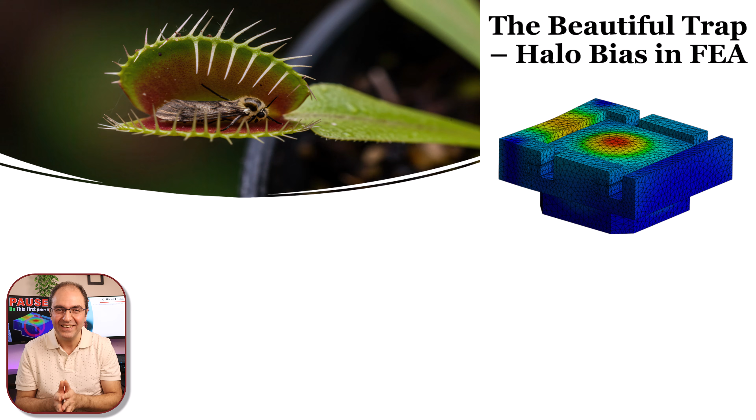Look at this contour plot of total deformation on this device that is called hydroformer. Is this colorful? Is it beautiful? Yes, it is. But is it correct? I can tell you, it's not. Now, let me show you the correct one. See the difference? So remember, just because your model looks good doesn't mean it is right. Beauty in FEA should never ever replace scrutiny. This is a very important message I have for you.

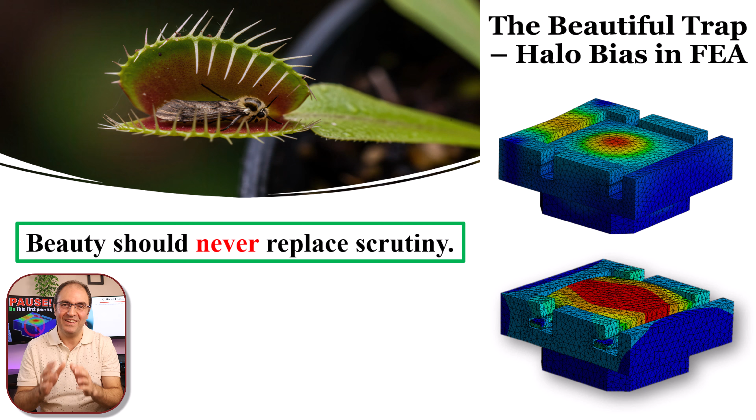Now, let's switch the gear. Let's talk about theory. Learning the theory behind FEA isn't optional, it's essential. It gives you confidence, helps you troubleshoot, and makes your model more than just guesswork with nice colors. But don't try to learn everything at once. You don't need to dive straight into nonlinear thermomechanical coupling or plasticity models on day one.

Start simple. Walk before run. Let your knowledge of theory grow with your experience. That way, you won't drown in it. You'll actually use it. Oh, one thing I need to mention. We will also cover some theory in this video series. I'm sure you will learn a lot and enjoy.

Now, theory has another form as well. Let's cover that too. I am talking about the theory behind the physics of the finite element model. You need a solid grasp of the fundamentals. Start with statics. Make sure you can draw and interpret free body diagrams. Can you isolate a part of your assembly and show all the boundary conditions on it correctly?

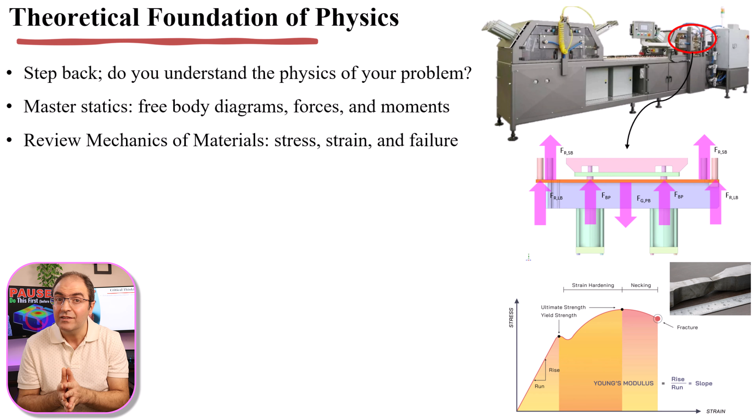Next, review mechanics of materials. Know how materials deform, how stress develops inside components, and when yielding or failure occurs. Without this understanding, you won't be able to judge whether your results make sense or not. But remember, skill in one area doesn't automatically translate to another. Being confident in structural mechanics doesn't mean you're ready to tackle heat transfer or fluid flow problems. Each domain has its own governing equations and unique behaviors.

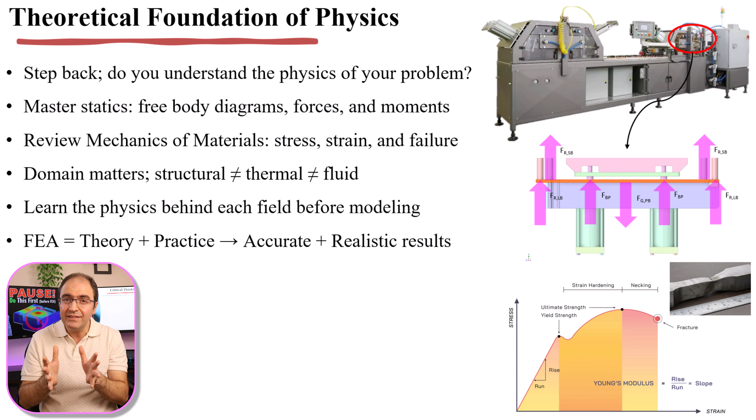If you're analyzing thermal gradients or fluid dynamics, take the time to learn the underlying physics before setting up your model. Ultimately, effective FEA requires balancing theory and practice. Theory guides you in building the right model and interpreting results critically, and practice tells you what makes sense in the real world and what doesn't. Okay, enough about theory for now.

Let's talk about an important resource that can help you in your FEA journey. I want to talk about FEA Mentor. Yes, if possible, find one. Someone you can bounce ideas off of, ask questions, and learn from their experience. A good mentor doesn't just give you the answers, they help you ask better questions. They have likely seen the pitfalls, the common mistakes, and the clever tricks that don't show up in textbooks. And having someone in your corner can accelerate your learning more than any manual or tutorial.

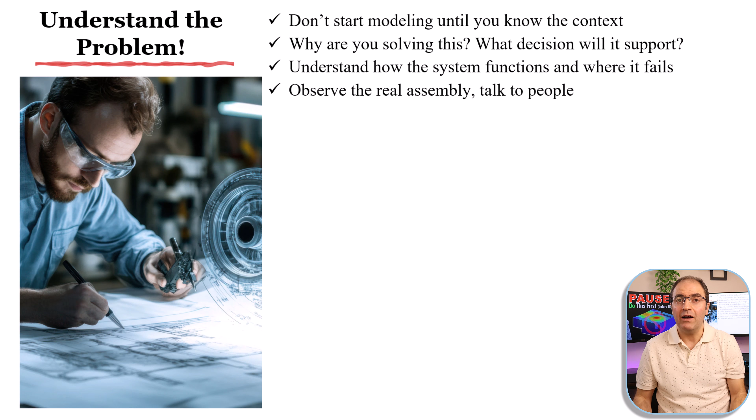Now check the CAD model with a critical eye. What's simplified? What is missing? Where are the joints? Where are the contacts? What is bonded, bolted, or free to move? Then identify material behavior. Are you dealing with ductile failure, brittle one, fatigue, temperature sensitive behavior?

Then loads and constraints. What's applied? What is prevented? Is it thermal, dynamic? How about transportation? How about multiple load cases? Then define the overall physics of the problem. Is it structural, thermal, coupled, modal, transient? Now decide what outputs matter. Stress, deformation, temperature, pressure. Remember, not everything you can plot is something you should use for the outputs.

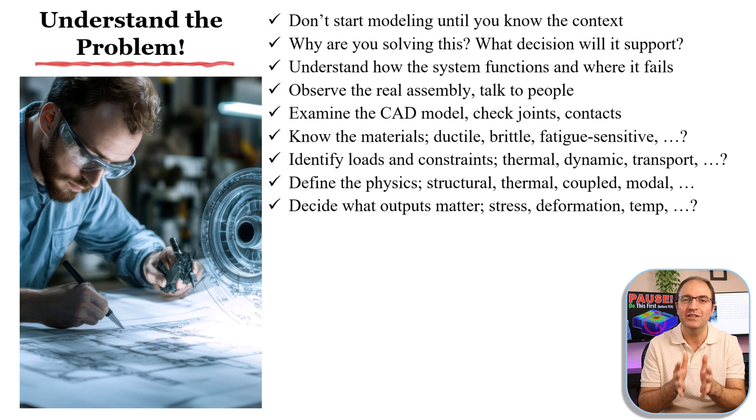Then set the accuracy target. Do you need a rough estimate or a high confidence value for safety, performance, or design sign-off? And finally, before you press solve, can you predict the outcome even roughly? That's how you build intuition and catch mistakes early.

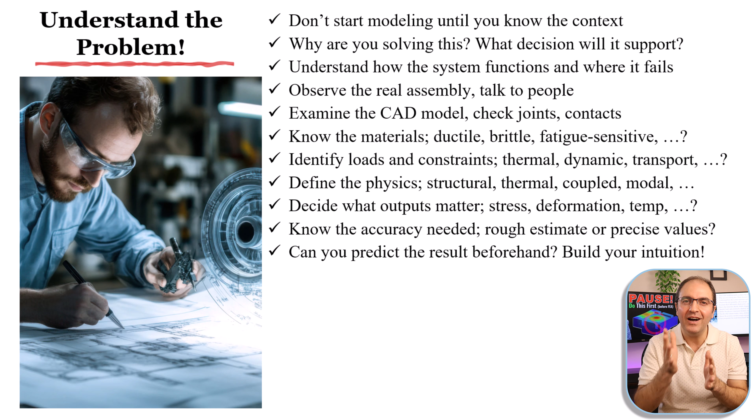Okay, in this long list, let's zoom in on two items that deserve extra scrutiny here. First, physics, or in other words, choosing the right type of analysis. FEA isn't one tool, it's a toolbox of solvers. And each solver exists because it answers a different kind of physics question. So instead of clicking a static structural out of habit, let's choose the analysis type with intention.

Let's begin with a simple question. Does time matter in this problem? If loads and responses are essentially constant, a static analysis may be enough. But if anything evolves with time, a ramp load, an impact, a thermal cycle, then you need a transient analysis.

Next, even if time variation is not the main issue, vibration still might be. If dynamic effects matter, start with modal analysis to find natural frequencies and mode shapes. If the system is excited continuously, harmonic response captures a steady oscillation. And if the excitation is irregular or noisy, random vibration is often the right choice.

Now, let's talk about stability. Ask this question: could the structure suddenly lose stiffness and change shape dramatically? This could be due to buckling. So, if buckling is a concern, eigenvalue buckling gives a quick estimate, but when imperfections, contact, and post-buckling behavior matter, nonlinear buckling is the more realistic approach.

Now, shift your attention to temperature. If heat transfer affects performance or stress, you may need a thermal analysis. Steady-state thermal is for constant conditions. Transient thermal is for heating and cooling over time. And sometimes the real problem refuses to stay in one box.

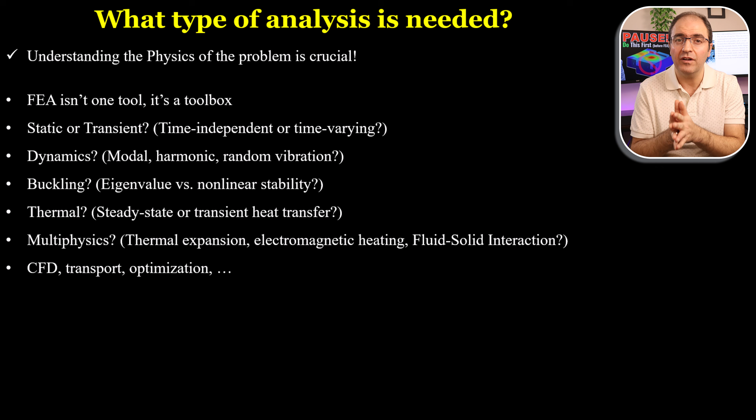I also want to mention that sometimes problems belong to other things like CFD, mass transport, or optimization studies, not a purely structural analysis. That's why software like ANSYS offers so many analysis systems. They are not extra features, they are different answers to different engineering questions.

And now, after you choose the analysis family, you make the next critical choice. Will the model behave linearly, or do you expect nonlinear effects? Because linear versus nonlinear is not a separate topic. It can actually show up in all the analysis systems that we have covered so far. We will cover nonlinear analysis in future sections of this series.

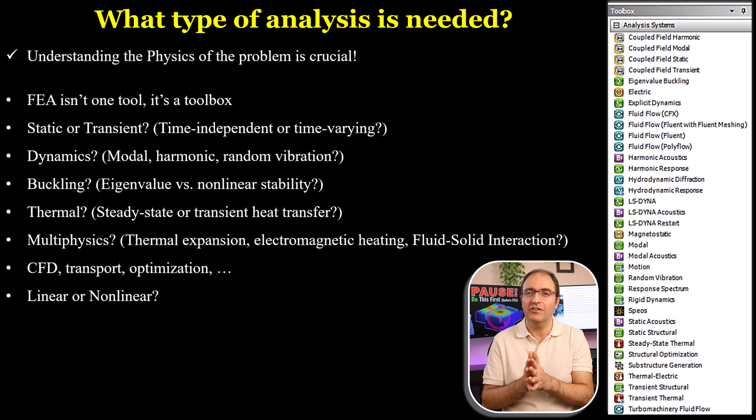Now let's talk about outputs, because the outputs you choose should come directly from the question you're trying to answer. Let's start with the most common one, stress distributions. If your concern is yielding, fracture, or failure, stress is often the first output you look at. Remember though that stress itself comes in different flavors, like principal stresses, von Mises stresses, also known as equivalent stress, or shear stress.

But sometimes stress is not the main story. Sometimes the story is shape change. That's when you focus on displacement fields to check deflection, alignment, clearance, and fit. And once you know how the model deforms, you often need to know what the supports feel. That leads to reaction forces, critical for sizing bolts, brackets, bearings, and anchors. Though in many cases, for these items, just hand calculations should be enough.

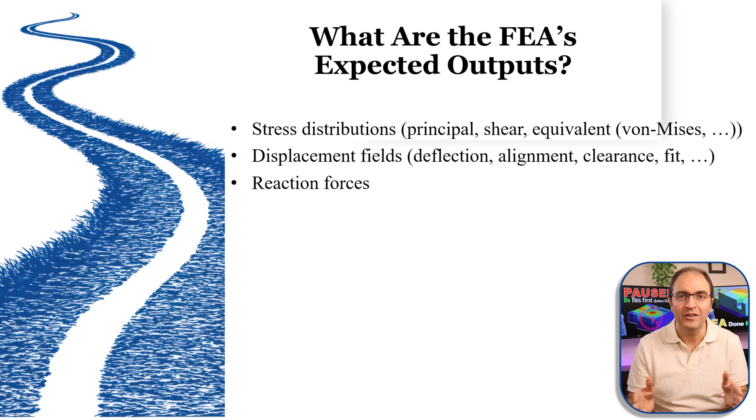Now, if your system vibrates, your outputs change completely. You may need natural frequencies and mode shapes to understand the dynamic behavior before you even think about the stresses. And if temperature is involved, you shift the game. Now you're looking for thermal gradients and often thermal stresses that come from expansion or contraction and constraint. For slender structures, another output becomes central, buckling capacity. Not how much does it bend, but when does it become unstable.

Sometimes the output is not a field at all. It's a single engineering design number, for example, a factor of safety, based on a chosen failure criterion. And in more advanced problems, the outputs go beyond simple stress and displacement. You might need fatigue life predictions for repeated loading. You might need residual stresses from welding, forming, or prior load history. You might track damage accumulation as the material degrades. Or you may care about contact pressure between the mating parts. And yes, I know, there are many more.

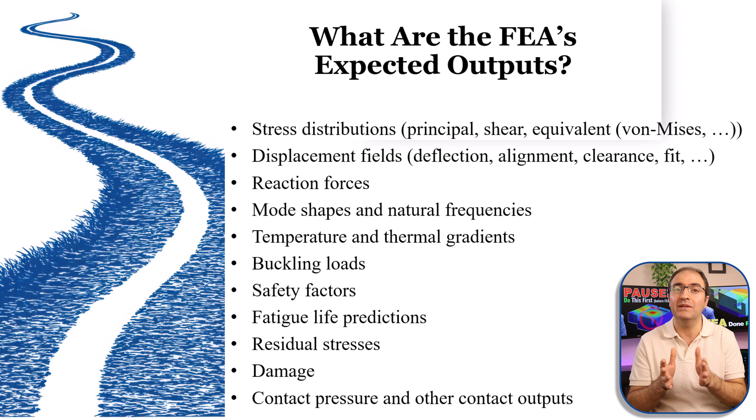But here is the catch. Not every analysis type can produce every output on this list. So before you build the model, be clear about what you expect to extract and what you will use it for. Now that we have clarified the problem, the physics, and the outputs, we're ready for a really important question. That is, do I even need FEA to solve this problem?

You'd be surprised how often students come to me with an FEA model and ask for help, when all they needed was a basic static analysis or a quick hand calculation. And my first question is always this: why FEA? Because here is the truth: FEA isn't free. It takes time and effort. And if done poorly, it can lead you down the wrong path with a false sense of accuracy. This false certainty often comes from a halo effect around FEA. Because the tool is powerful, we assume every output is right.

So every time you have a problem in hand, before modeling it in FEA software, ask yourself, can this be solved using basic free body diagram and mechanics of material calculations? I know this example is for structural problems, but you get the idea. If the answer is yes, FEA might not be needed. Also, you can ask, do I really need fine-grained stress field or displacement data? Or you can ask, is there something in this problem like geometry, loads, or other boundary conditions that are complicated? If the answer to either of these two questions is yes, then go ahead, use FEA. But if a simple hand calculation gets you there faster and more reliably, go with it. In engineering, simple and right beats complex and wrong every time.

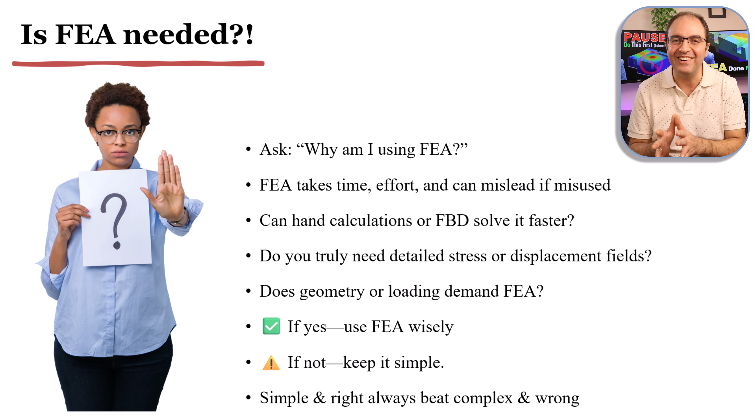Okay, since this video is on practical tips in FEA, from now on we assume that we need to use FEA for the analysis we have in hand. So far, we have discussed the type of analysis and the outputs we expect from it. The next step is to make sure we have a clear objective. And that means going beyond just running a simulation. We need to ask what exactly we are trying to achieve with this model.

This is where a SMART framework comes in. The objectives must be specific, measurable, attainable, relevant, and time-bound. First, let's focus on specific. If we want the objective to be specific, we want to know, what do I want to learn? Is it maximum stress, displacement, factor of safety, or fatigue life? Specific means the objective tells you exactly what output matters and why.

Next, the objective must be measurable. How will I quantify success? Do I have clear numerical targets or thresholds in mind? A stress limit, a deflection tolerance, a minimum frequency, a target safety factor?

Then, the objective must be attainable. Is my objective realistic with the model I can build? Do I have the necessary data about physics, boundary conditions, and material properties? And also, do I have the right equipment to actually run these simulations?

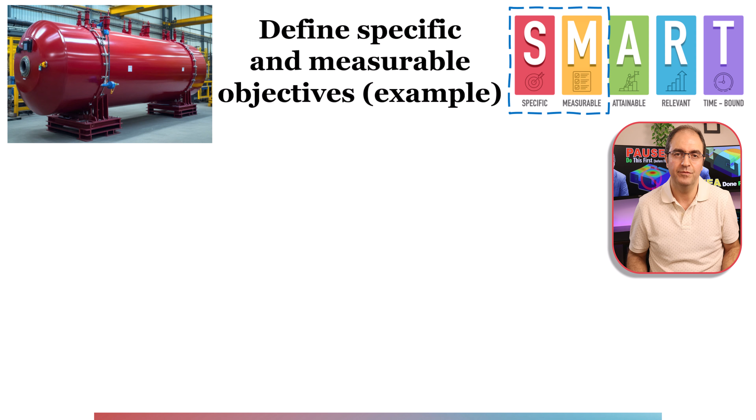Imagine we're analyzing a pressure vessel. Depending on how we phrase the objective, the clarity can vary a lot. A very poorly defined objective might say, to determine if this design will work. But what does work even mean? Does it mean no leaks? No mechanical failure? Under what conditions?

It's too vague. A step-up objective, but still a poorly defined one, can be to determine if the pressure vessel will break. Okay, that's better, but it's still too broad. Break under what kind of loading? What failure criteria? And where exactly? Now, let's make it better.

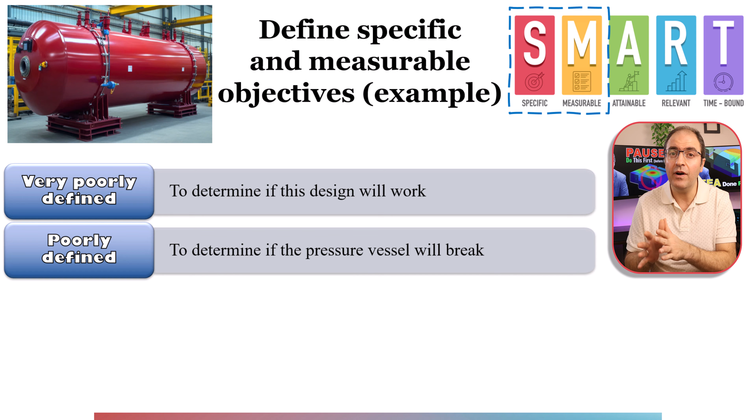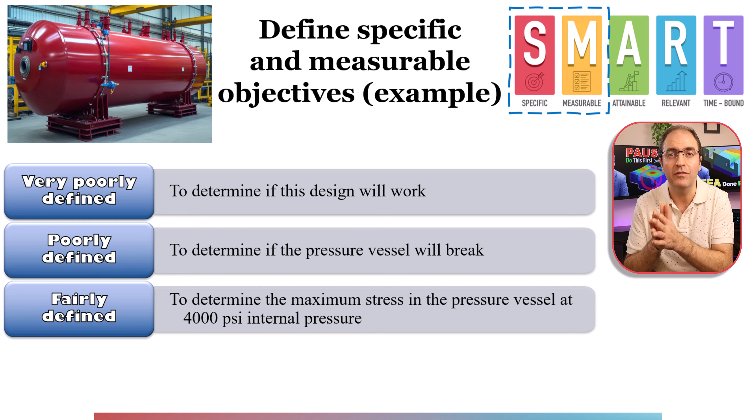A fairly defined objective states to determine the maximum stress in the pressure vessel at 4,000 psi internal pressure. That is more specific. We've got the load defined, but it is still not fully measurable because we haven't defined what stress means in a precise, reportable way. Is it von Mises, principal stress, membrane stress?

And finally, a typical specific and measurable objective is to determine the maximum von Mises stress at any point in the pressure vessel under a static load of 4,000 psi internal pressure. Now we have both S and M. It is specific because the loading condition is clearly defined, and it is measurable because the output is unambiguous. It is the maximum von Mises stress.

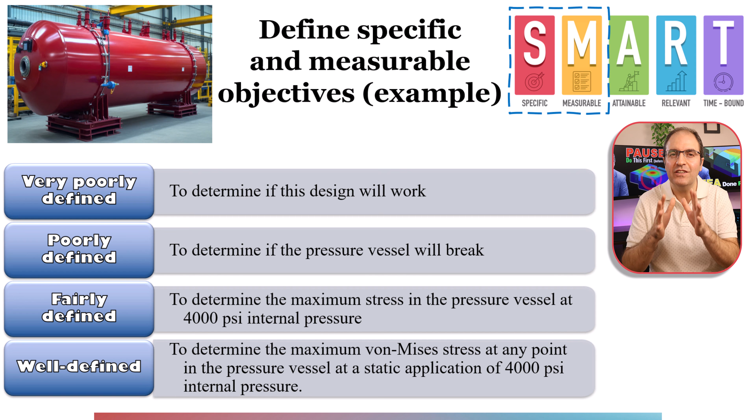This was just an example. As you know, real projects often need even more details in the objective statements. Clear objectives drive every modeling decision, from meshing to post-processing. So, if you can't state your objective in a way that is specific and measurable, you're not ready to build the model. Let's talk about one more important topic before we end section 1 of this series.

I want to talk about analysis paralysis. So far, we have covered a lot of ground on what to think about before you start your simulation: understanding the problem, choosing the right type of analysis, and defining objectives. But you cannot stay in this phase forever. Yes, you need to understand the problem, but at some point you need to start as well. Build the model, run something, see what breaks, fix it, improve it.

Overthinking, that is trying to make everything perfect before clicking solve, can hold you back more than any technical challenge. That is called analysis paralysis. In FEA, even after modeling starts, analysis paralysis shows up like endless mesh refinement or tweaking boundary conditions again and again without solving once. It feels like diligence, but it's really fear of being wrong.

So, how do you break free from analysis paralysis? First, set a time limit. Give every phase a stopping point. Next, get feedback early. Someone else might spot the issue faster. Then, define good enough. Know what level of accuracy is enough for your purpose. After that, iterate: model, solve, fix, repeat. And finally, accept uncertainty. You'll never eliminate it all, and that's okay. The goal of FEA isn't perfection, it's decision making. So move forward with clarity and let progress guide you.